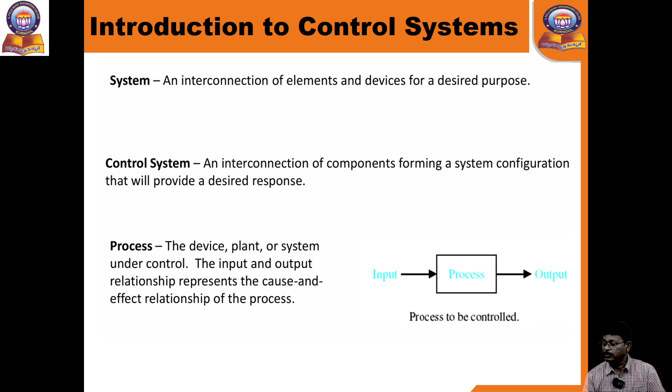So what is the process here? The process may be a plant or a system under control, with input and output. So relations between input and output show the cause and effect relations of the process. These are control systems.

What are the different types of control systems? Mainly there are two types: open loop control system and closed loop control system. Now multi-variable control systems have also come into use. Previously, only open loop and closed loop were studied, but now it is multi-variable systems.

So what is an open loop system? There is no feedback in this open loop system. They are not taking any feedback from the output to the input. Not getting any feedback - this is called an open loop control system.

Here you can get the desired output for a desired input. A control system consists of subsystems and plants assembled for the purpose of obtaining the desired output with the desired performance, given a specified input. This figure shows the control system in its simplest form.

The input represents the desired output. Any control system consists of three essential elements, namely input, output, and system, which we call the process here.

The input is generally called, in our electrical systems, the excitation, applied in the form of an electrical energy source. The system is an arrangement of physical components, and the output is the actual response obtained from the system.

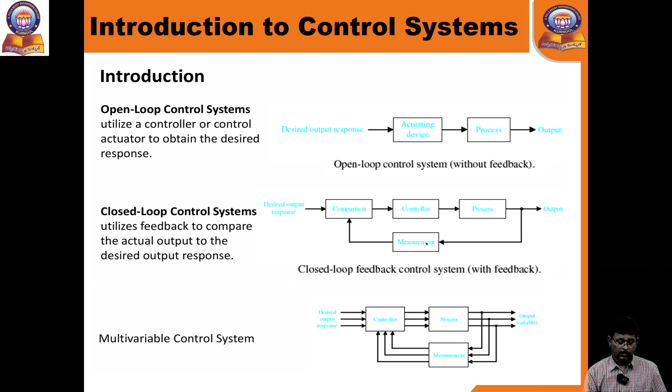Now, for a control system, for a closed loop control system, there are two types of feedback. One is the negative feedback, one is the positive feedback.

You can observe the system here. So there is the input, now we are taking the controller, and one is the process, maybe the plant, then the output. Then we are taking the feedback from the output to the input. So here you can observe this, these you are taking as the negative feedback.

You can take here also positive, we call it positive feedback. So negative feedback and positive feedback depend upon our plant, our requirement. It depends on our opinion, it may be negative or positive feedback.

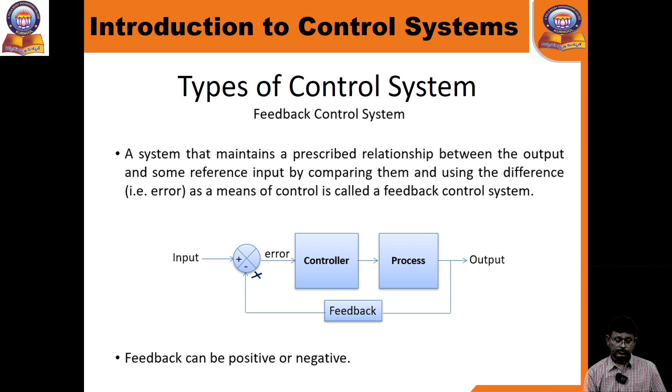Now you can observe what are the different types of control systems. So depends upon the input, or we call it a system. So here you can observe the different types: these are linear control systems. What is a linear control system?

In order to understand linear control system, we should know the important property, what is called homogeneity. A system is said to be homogeneous if we multiply the input with some constant, then the output will be the multiplication of the same value of that constant. So that is called a linear control system.

So consider a purely resistive network, with a constant DC source, resistive network with constant DC source. Then what is non-linear? What is it? Right, it is called linear control, you can observe this here.

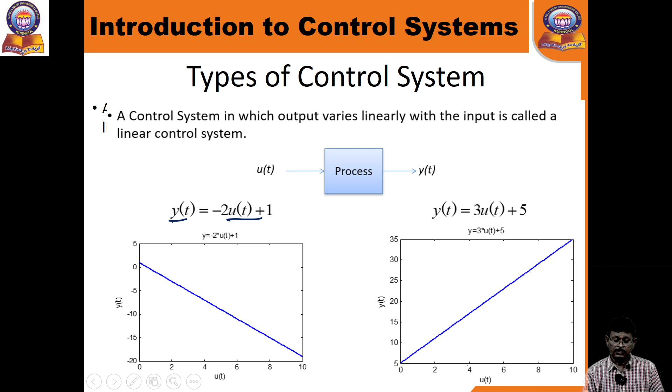So what is the non-linear? We can simply define a non-linear control system as those systems which do not follow the principle of homogeneity. The system which does not follow homogeneity is called a non-linear system.

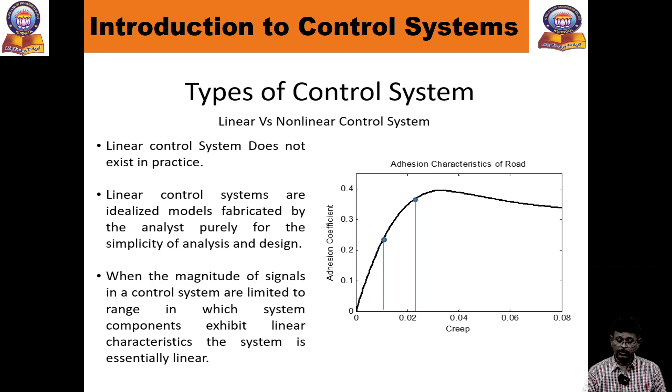Not generally all the devices, not all, but you can observe non-linearity in different types of devices. Linear control systems are idealized and fabricated purely for simplicity of analysis and design. When the magnitude of the signal in the control system is limited, so the range is complete, the control system exhibits essentially linear behavior.

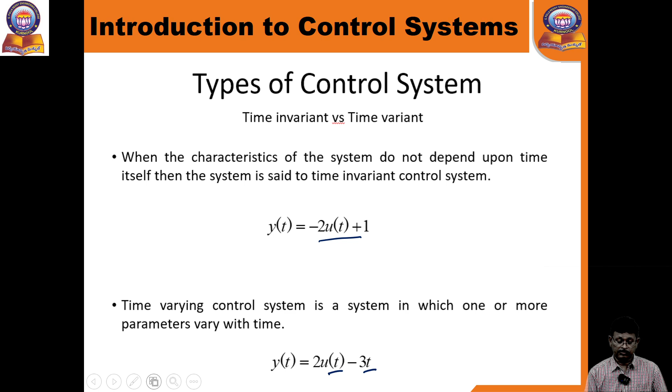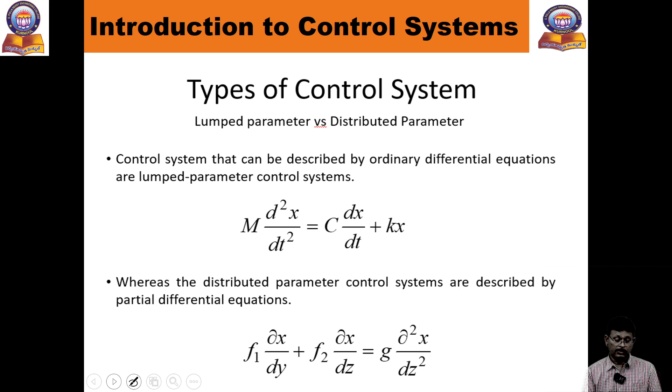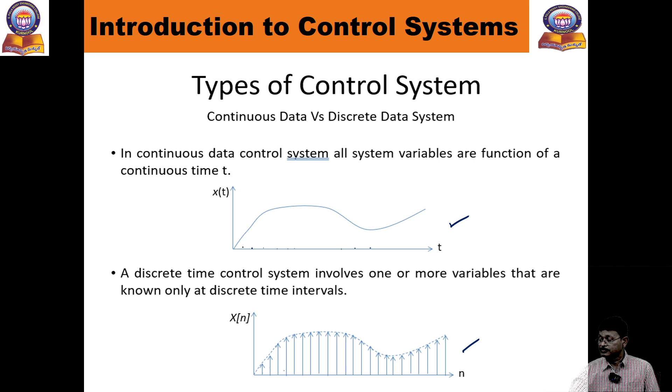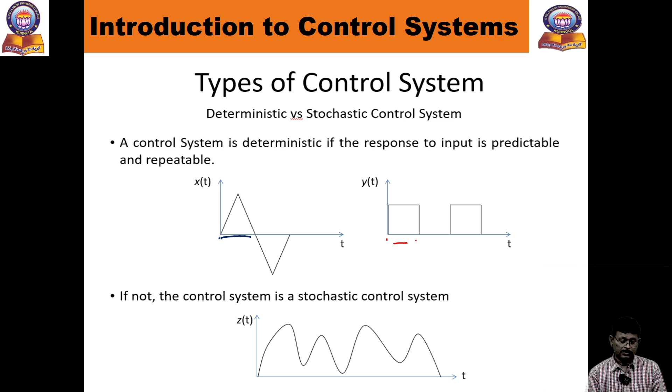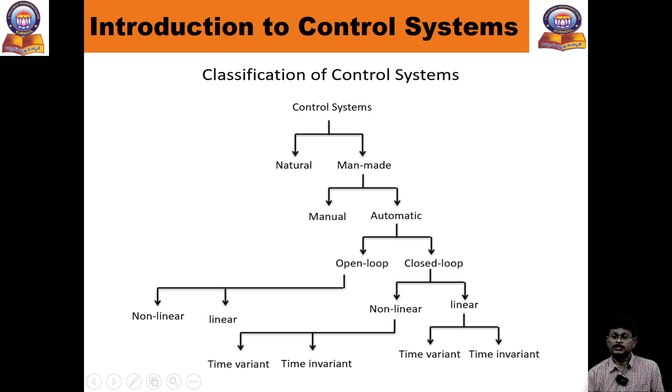So at the end you can observe the overall classification of control systems: natural, man-made, manual, automatic, and automatic systems further split into open loop and closed loop systems. Open loop may be non-linear or linear, closed loop may also be non-linear or linear, and further classified into time invariant and time variant. These are generally how we classify control systems.

So what is the difference between open loop and closed loop? From an exam point of view, this is commonly asked. In an open loop system there is no feedback, while in a closed loop system there is feedback - it may be negative feedback or positive feedback. The open loop system is not intelligent since it doesn't get any feedback from output to input, whereas the closed loop has a controlling action. There is no possibility of undesirable system oscillation in open loop, but in closed loop there can be undesirable oscillations - in electrical systems this is called hunting. In open loop, the output will not vary for a constant input provided the system parameters remain unaltered, but in closed loop we can vary the input for a desired output - depending on the feedback, there is a change in input in a closed loop system.

Then coming to the open loop system, the output variation due to variation in the parameters of the system is greater.

Coming to the closed loop, the system output varies due to variation of parameters, which can happen in a feedback system. In open loop there is no error detection, but in closed loop there is error detection. Open loop has small bandwidth, whereas closed loop has large bandwidth.

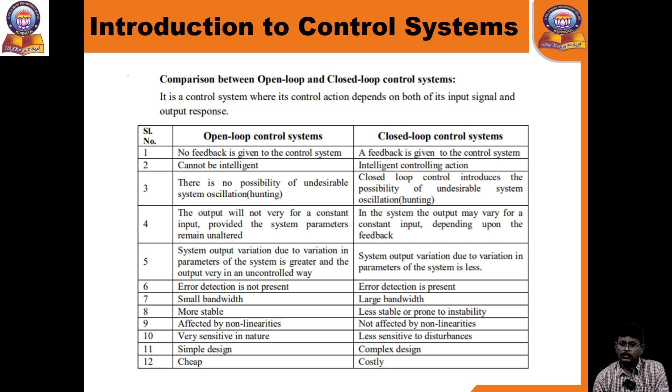From a design aspect, the open loop is simple design, the closed loop is complex design. From a cost point of view, the open loop is very less costly, whereas the closed loop system is very costly. So these are the differences between the open loop and closed loop systems.

Coming to the types of feedback, there are two feedbacks: one is called negative feedback, one is called positive feedback. Depending upon our requirement, it may be positive or negative, but generally most systems use negative feedback, not positive feedback.

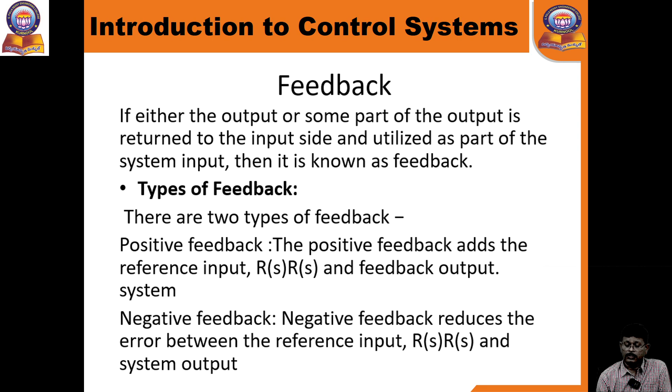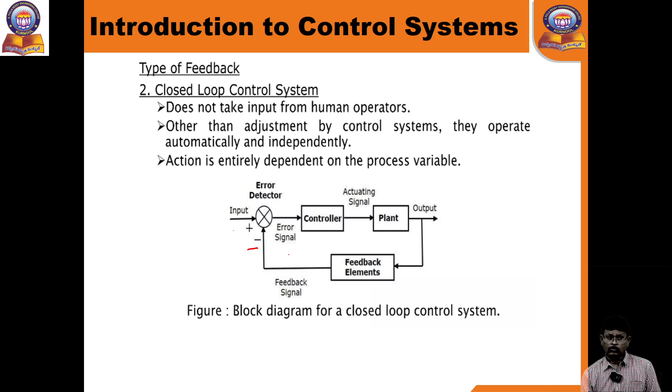Then error - what is error detection? The difference between the output and the input is called error detection. You get the error signal through the controller, then from the controller you get the actuating signal, which gives more input to the plant, and then again you get the desired output. So this is the block diagram of the closed loop control system with negative feedback.

Then what is called a transfer function in a control system? This is like efficiency in machines - if we want to discuss machines, what is the efficiency? Similarly, in control systems you get what is called the transfer function.

The transfer function is the ratio of the Laplace transform of the output to the Laplace transform of the input, assuming the initial conditions are zero. This is more important here - the initial conditions play a major role in a control system. So take any plant.

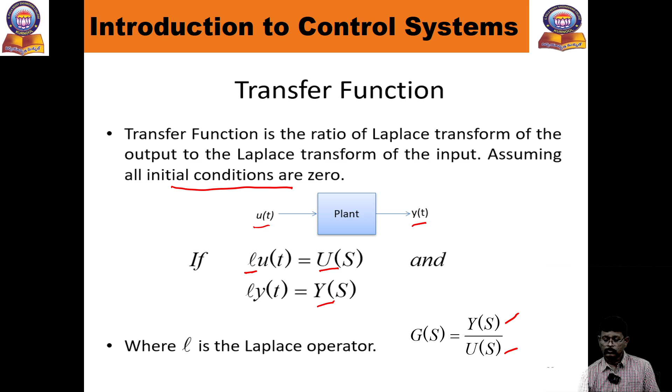The input is u of t, the output is Y of t. L denotes Laplace transform, so Laplace transform of the output, Laplace transform of the input. Generally the variables are taken in small letters: u of t, y of t. Taking the Laplace transform gives U of s, Y of s. The transfer function is not simply Laplace of output by Laplace of input directly as time functions, but G of s is equal to Y of s by U of s. This is the transfer function of the open loop plant.

Now these are the basics of the introduction to control systems.